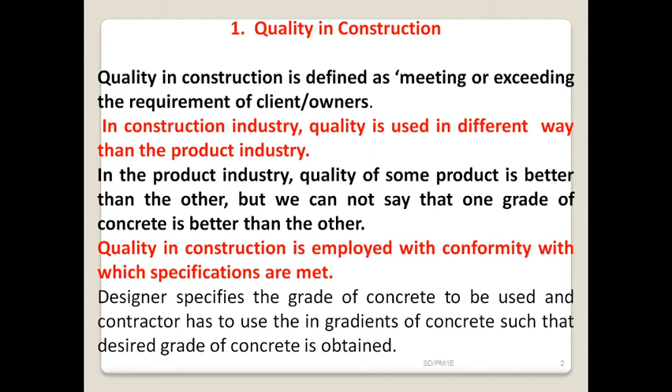Now when I say construction quality, we are trying to satisfy the following 5 items. One, we are satisfying the specification mentioned in the contract. Two, we are trying to complete the project in time without compromising the quality. Three, fulfilling the requirements within the budget. Four, avoiding the disputes which can probably occur - that also will be taken care of. And then ensuring the facility performs its intended purpose. When we take all these things together, we can say the quality is somewhat achieved.

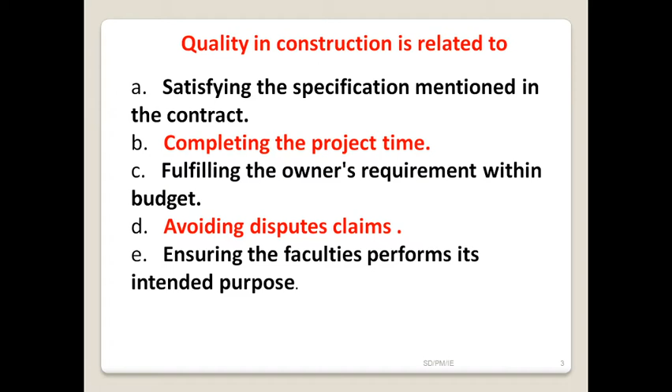We use certain products in the construction industry such as tiles and brick. Quality of these products can be partially related with the general connotation of quality, because it is going to be the product that we are going to use. But in the actual case, it is going to be the construction quality. Yes, there are going to be differences.

The other aspect in quality has slightly different meaning at various stages of the life cycle of the product, such as design stage or construction stage.

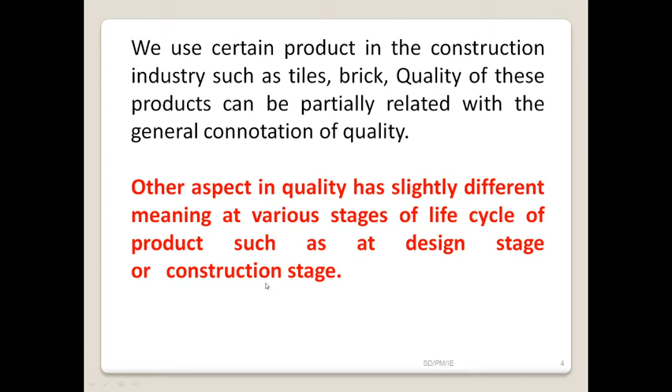Now the second point we are looking at in quality is about quality assurance. So from the word itself, assuring the quality - quality assurance is referred to as a scheme adopted by a construction company to maintain the standard or quality consistently. It is primarily an internal management system of a construction company. Generally, a company maintains a quality assurance chart by specifying the various checks at different levels as well as constantly improving the attributes.

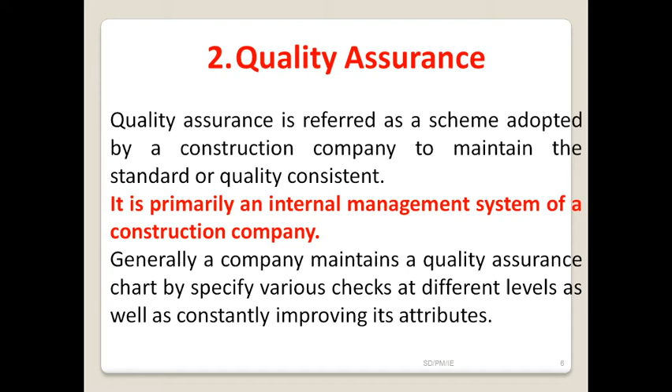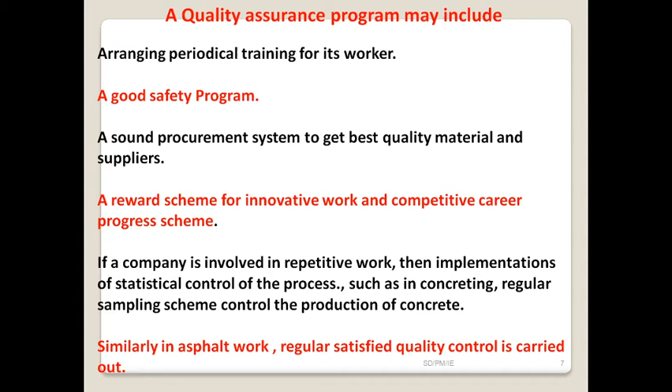A quality assurance program includes arranging periodical training for its workers. There should be a good safety program, a sound procurement system to get the best quality material and suppliers, a reward scheme for innovative work and competitive career progress. Similarly, if a company is involved in repetitive work, then implementation of statistical control of the process - such as in concreting, a regular sampling scheme to control the production of concrete, etc.

The third quality is about quality control.

What do you understand by quality control? Quality control is a periodic inspection to ensure that the constructed facilities meet the standard specified in the contract. It is usually carried out by a team of owner's engineers.

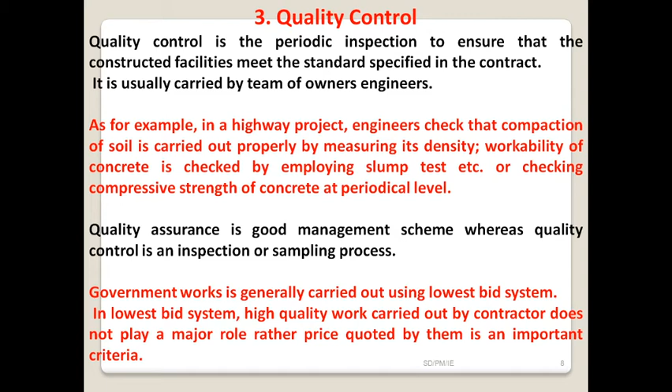For example, in a highway project, engineers check that compaction of soil is carried out properly by measuring its density. Workability of the concrete is checked by employing slump tests, etc., or checking the compressive strength of concrete at periodical level. So this is what we call quality control.

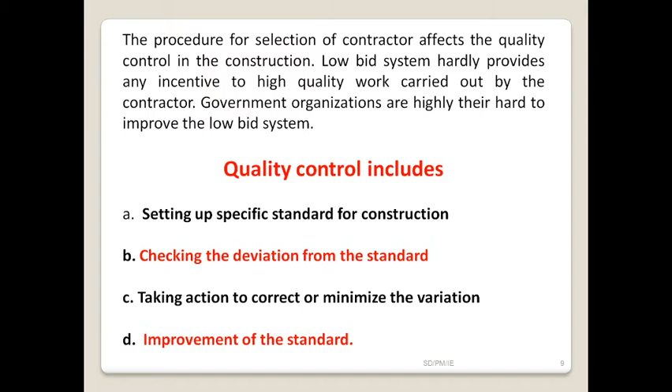It includes setting up standard specifications for construction. We are setting the specific standard for construction. Second, checking the deviation from the standard, and taking action to correct or minimize the variation, and improvement of the standard. Fourth is going to be the quality standardization.

Now we have got ISO 9000 standards to fix the standard for quality. As we are aware, ISO stands for International Organization for Standardization, an organization founded in Geneva, Switzerland in 1947. There is a series of quality assurance standards that assures the client that the organization having obtained certification works according to the specified requirement.

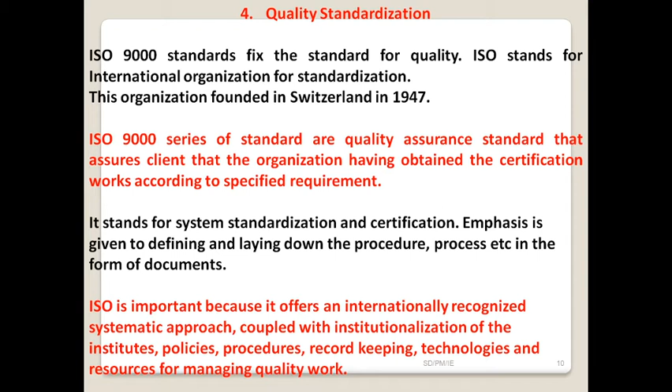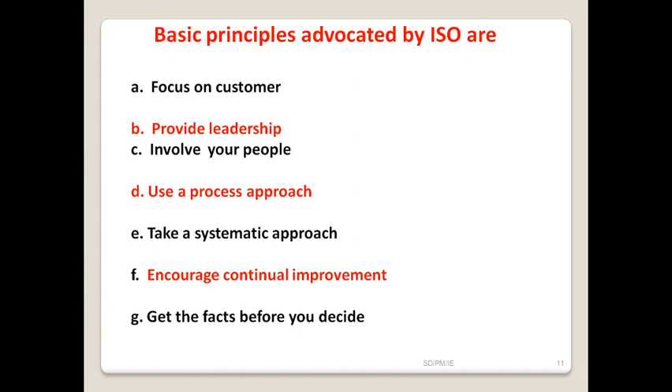The basic principles advocated by ISO are: there is going to be a proper focus on the customer. Proper leadership is being provided. We are trying to see that in the organization all the people are involved. There is a process approach for each and every process, and it is followed by a systematic approach, and it always encourages continual improvement and getting the facts before you decide. So these are considered to be the basic principles by which the International Organization for Standardization, that is ISO, works.

Now coming to what we call the elements of quality. The basic elements of quality in construction are quality characteristics, quality of design, and quality of conformance. Now, what do you understand by quality characteristics? It is related to the parameters with respect to which quality control processes are judged. Quality characteristics include the strength characteristics, color, texture, dimension, height, also inclusive of the compressive strength, workability of concrete, etc.

Quality of design refers to the quality with which the design is carried out. It is primarily related to meeting the requirement of the standard, functionally efficient system and economical maintainable system. And quality of conformance refers to the degree to which the constructed facility conforms to the design and specification. Quality of conformance is affected by field construction methodology.

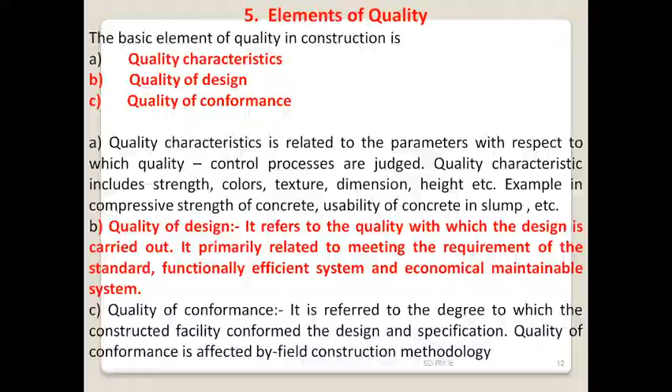And the last chapter is about total quality management. When we are talking about TQM, what does it mean? What are the basic principles behind total quality management? It is a system of continuously improving goods or services. The philosophy was promoted by Edwards Deming. A TQM approach is considered essential to the long-term survival of a business such as construction. Total quality management provides tools and techniques for cultural changes and continuous improvement.

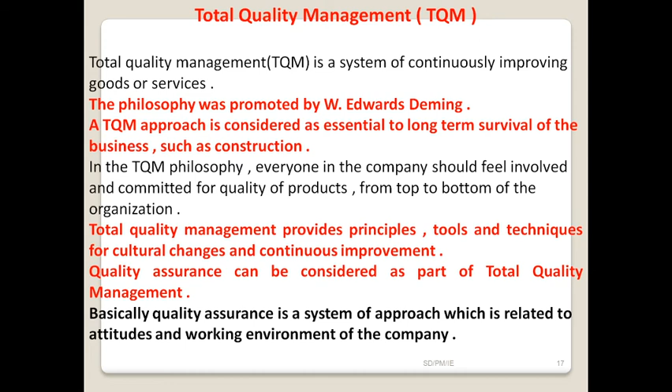There are 14 principles put forward by Deming to achieve total quality management. Number one, create a constant commitment to the employee for the aim and purpose of the company. Two, adopt a new philosophy to avoid defects. Three, use statistical quality control and understand the purpose for inspection. Four, practice of business should be based on statistical evidence rather than the price tag alone. Five, improve constantly and forever production and services.

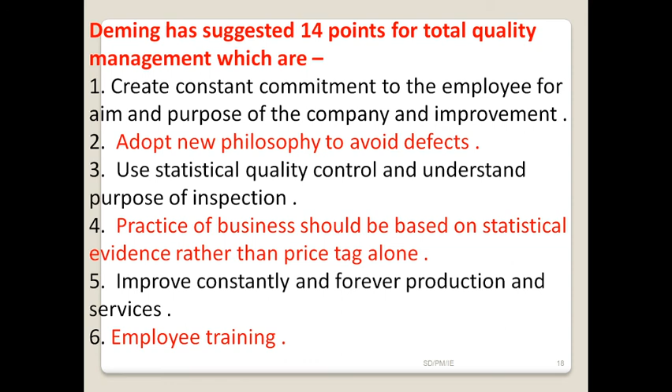Six, employee training. Seven, teach and institute leadership. Eight, encourage communication. Nine, encourage teamwork. Ten, eliminate posters or slogans without specific improvement methods. Eleven, use of statistical methods to continuously improve quality and productivity. Twelve, remove the barriers that rob people of pride of workmanship. Thirteen, provide education and self-improvement for everybody. And fourteen, define top management commitment for quality. So these are the 14 principles of total quality management.